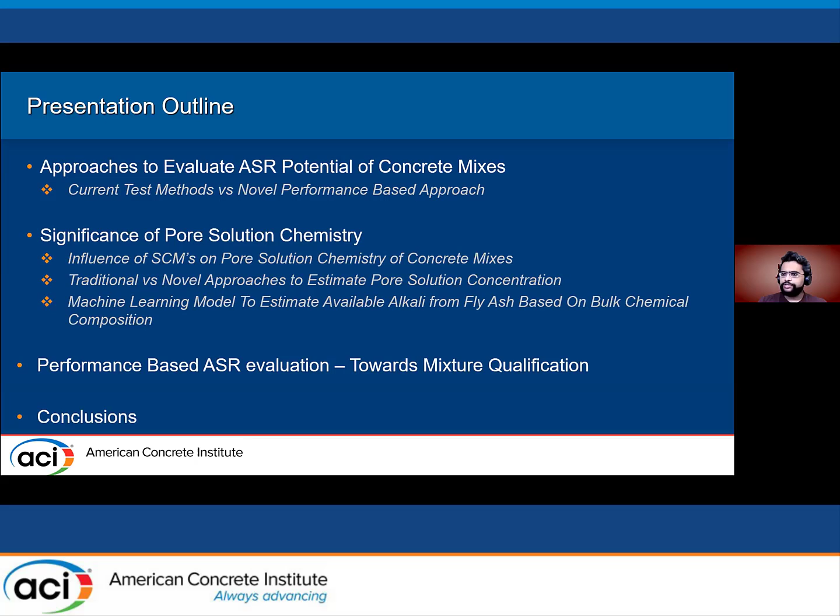So first, discussing the traditional approaches to evaluate ASR potential, we have ASTM C 1260, the mortar bar, and also the ASTM C 1293. The first one is accelerated, which is probably around 14 days, and tested under severe test conditions. But sometimes the results have been found to be not correlated to the field performance, whereas for the 1293, the minimum duration for the test period is 1 year.

Let's look at the limitations of these approaches. These ASR tests really do not address the aggregate reactivity prior to use in concrete structures, and determining the threshold alkalinity of the aggregates is actually the primary step.

Also, the effect of alkalis from cement and the SCMs on the ASR at the direct level of pore solution alkalinity is not considered. These tests are usually performed at boosted levels of alkali, so the testing is not really performed at the level of the real pore solution alkalinity. And also, they do not really address the long-term performance of fly ash in concrete structures.

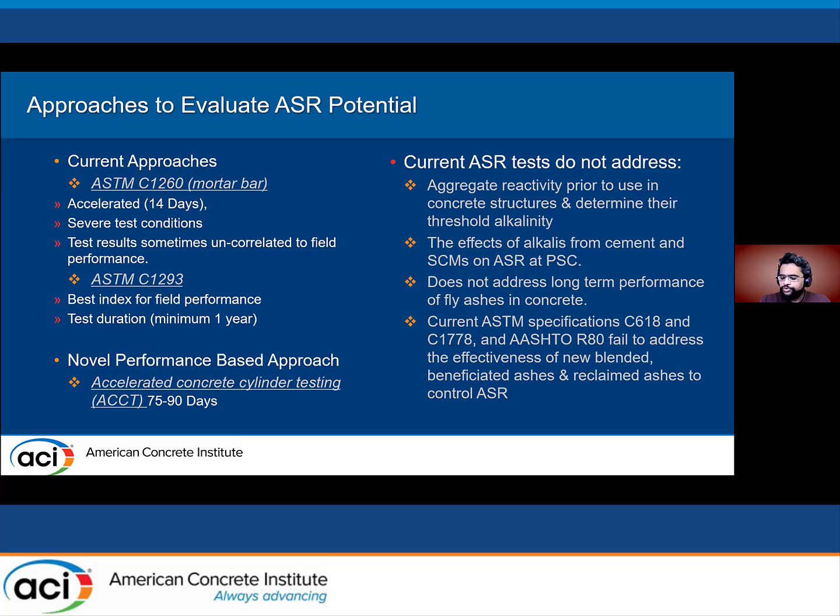So the new approach, which is the accelerated concrete cylinder test approach, presents a more performance-based evaluation to evaluate ASR potential, and also design the optimum replacement percentage for different SCMs. There are 4 different steps to this entire evaluation. The first is determining aggregate reactivity, and we could be using any method, such as the CAP based, which is cumulative aggregate potential based reactivity, or the VCMD test, which usually takes around 5 days, or the ACCT test, which takes about 28 to 45 days. The essence here is to really determine the aggregate reactivity in the first step.

Once we determine the aggregate reactivity, the next step would be deciding the optimum SCM replacement, which is a performance-based mix design formulation. For this, we really need to evaluate the pore solution chemistry for each concrete mix for different SCM replacement levels. And once we have the pore solution alkalinity determined, we go to step 3.

At this stage, it's just a comparison assessment. Is the pore solution alkalinity of my mix lower or higher than the threshold alkalinity of the aggregate that would be used in the structure? If it's lower, then it's not a problem. If it's equal, it would perform well, but only under mild conditions. If it's greater, then the mix design probably needs revision with a higher SCM dosage.

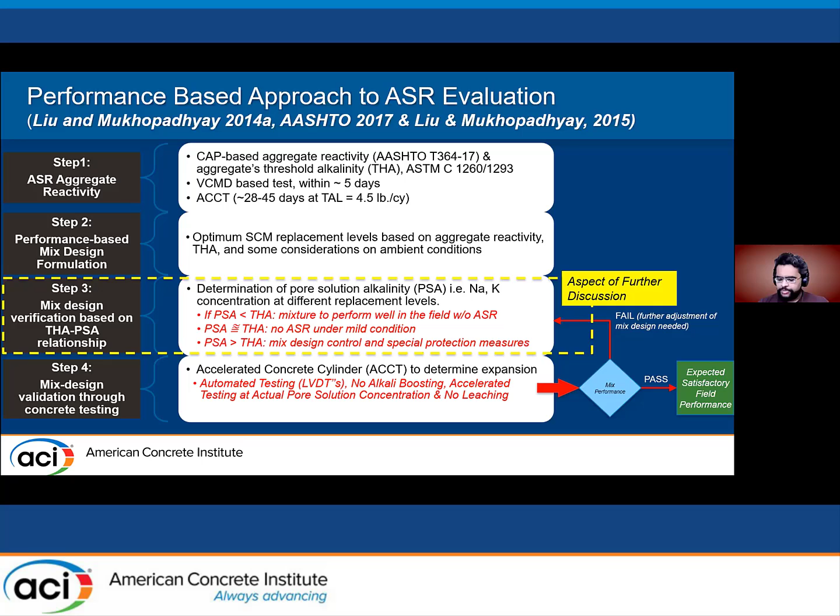Let's look at the overall objective of the alkali silica reaction and how SCMs play a crucial role in that regard. Now, definitely SCMs have been recognized as one of the most effective measures to prevent ASR. And of course, fly ash has been widely used by different state DOTs for ASR control.

But what has been really happening is that due to environmental regulations, there have been a lot of changes in the power plant operations. So this continuously changes the composition of the coal, or indeed the fly ash composition that is coming out of these coal power plants.

So this actually points to a very important fundamental aspect: any new test method, to be applicable, first has to address the performance, which has to be a function of the composition of the SCM. As the nature of the SCM changes, the fly ash composition changes, and the performance would be changing as well. So these test methods need to address the performance based on the composition.

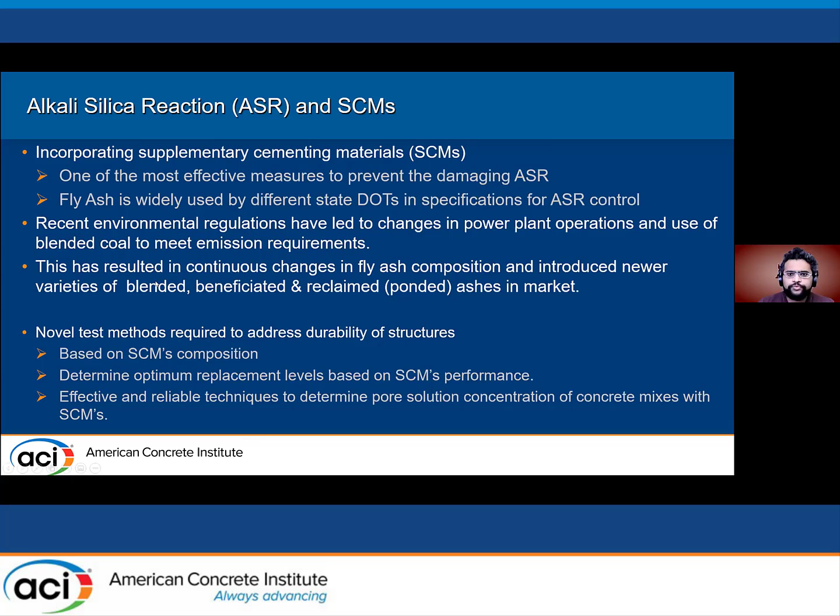And on that scale, the pore solution is the first aspect that we would be looking at. Just a quick discussion on how SCMs actually influence the pore solution chemistry. Now, whenever we look at the bulk XRF data, we look at Na2O or K2O, the sodium oxide and potassium oxide. The value there is essentially comprised of two separate parameters.

One is the crystalline phase or the readily soluble fraction, which is usually available within the first 24 to 72 hours after the hydration reaction starts. And the second component is the bound phase, which is gradually put into the pore solution as the clinker hydrates or as the pozzolanic reaction happens; they are released into the pore solution.

So when we look at some of the factors why SCMs actually contribute to a lower alkali pore solution, one of the common aspects it's attributed to is the cement dilution effect. But if you see the graphs on the right, this would not always be true.

If you replace an equal amount of cement with even class F fly ash, the one that we used in our project, it definitely has higher alkalis as compared to the cement, and class C had significantly higher. So the cement dilution effect for fly ashes has to be considered with a little bit more caution. And second is the slow release of bound alkalis.

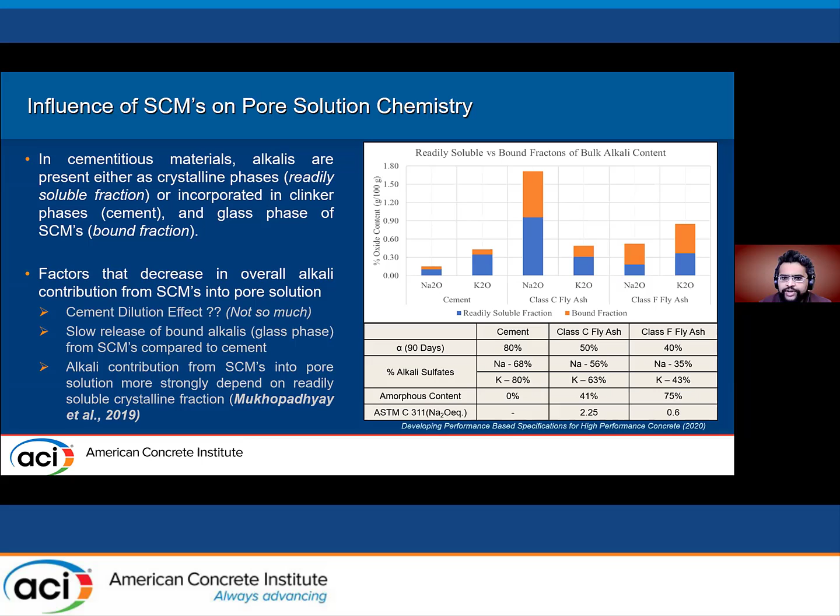So why is the composition really important, and why do we have to consider it for deciding the behavior of these ashes? This is the QXRD quantification of both class F and class C fly ash. As we saw on the previous slide, the contribution of the alkali directly comes from the crystalline phases, and for class C, we see a significantly higher level of alkalis or crystalline phases as compared to class F fly ash.

Now, this is directly reflected in figure 3, where on the x-axis the available alkali to total alkali ratio for class F is lower than class C. What is important to notice here is that we see two distinct peaks, a definite difference in alkali contribution from F and C ash just based on its composition.

And a fourth important aspect that we also need to consider with the SCMs is that these SCMs add silica, or amorphous silica. So as the silica content increases, the C/S ratio in the overall hydrated phase, or the C-S-H, decreases. At a lower C/S ratio, it has the capacity to bind alkali and further lower the pore solution concentration.

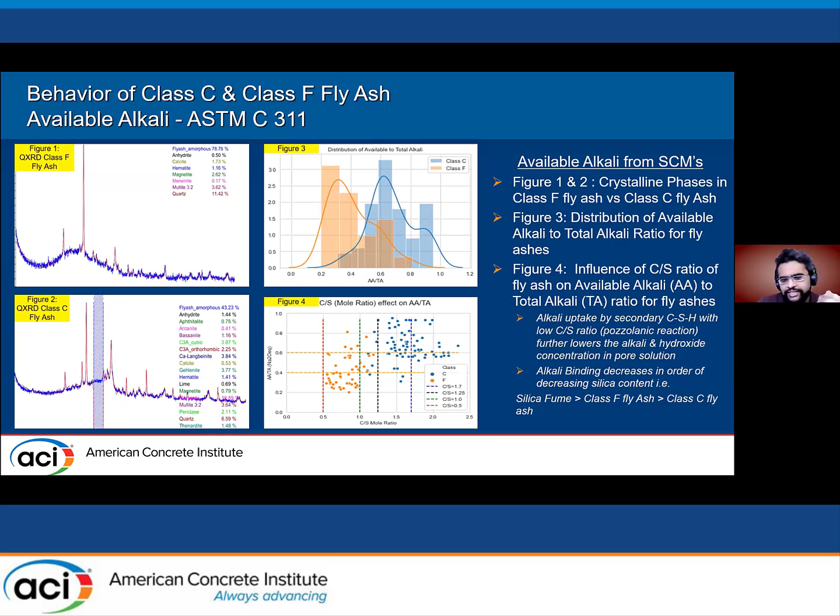If you look at figure 4, the lower the C/S ratio or the higher the silica content, the lower is the available alkali as a fraction of total alkali. And this phenomenon, also known as alkali binding, decreases in the order of silica fume, class F fly ash, and then class C fly ash.

So let's look at some of the techniques that are currently available to determine the pore solution concentration of concrete mixes, even with the SCMs. When we are referring to pore solution concentration, we are generally referring to the sodium and potassium concentration. The extraction technique is one of the most common approaches, but it's a highly complex procedure, limited to very early ages.

There are extremely few studies which have reported extraction values up to the age of 56 and 90 days. But at later ages, the dissolution of alkali in the pore solution increases with the applied pressure. So at a higher age, the more pressure applied, we get artificially high concentrations, which is also a factor to be considered.

Towards modeling, the NIST model is one of the widely used approaches, but one of the things the NIST model does is it assumes a default 75% alkali contribution from all its ingredient phases. If we remember our cement and fly ash composition, the 75% was the average contribution from cement, which appeared to match with cement. But for the fly ashes, it represents an overestimation, and this is more so for class F fly ash.

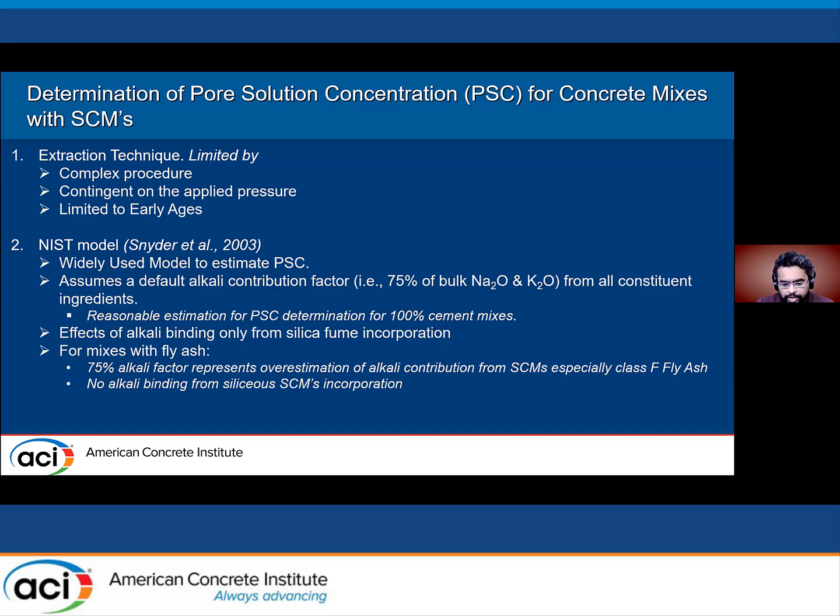So this is a novel technique that was developed in previous research in 2019. This is the combined NIST plus ASTM C311 approach. From our previous discussion, we have realized that whenever we are considering SCMs or fly ashes, we really have to look at the level of available alkali from these fly ashes, which cannot be assumed as a fixed percentage or a constant value. This approach allows us to incorporate available alkalis based on composition. And when you combine this approach with the NIST model, the alkali binding from the silica fume also comes into play.

So for the cement, of course, since there is no SCM, both the NIST and the combined NIST plus ASTM C311 approach perform pretty well. But we really see beautiful results when we look at class F fly ash incorporation, because earlier we saw the class F fly ash contribution to available alkali was significantly lower than the cement. Although the bulk alkali may be higher, the available alkali is lower. So assuming a default percentage of 75 may not be an appropriate method, and we see a huge difference in prediction between the two approaches.

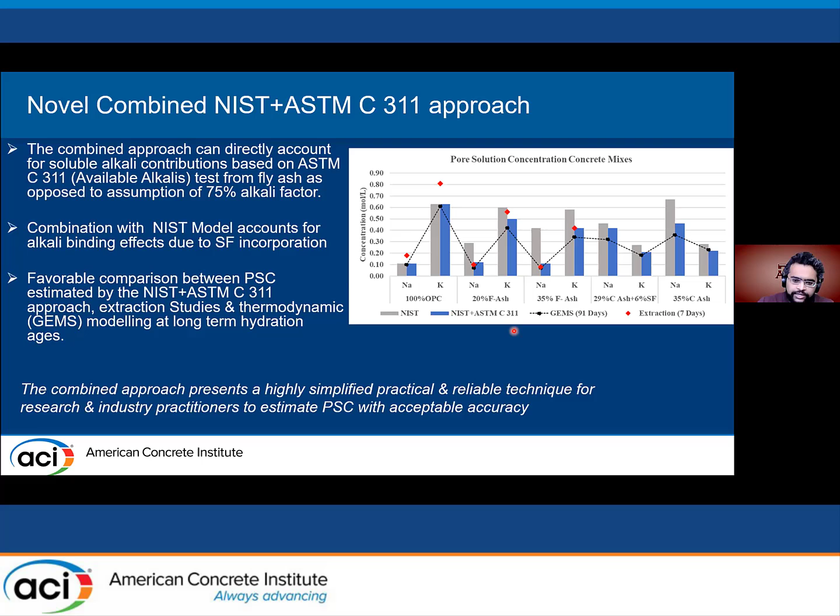Now, when you validate this with the extraction studies, the values for the combined NIST and ASTM C311 approach match pretty well with the GEMS thermodynamic model and also with the extraction studies. The thermodynamic model is a highly reliable method, but it also presents a very complicated technique for industry practitioners. So here, the important aspect is that the combined NIST and ASTM C311 approach presents a highly simplified and also reliable technique for both research and industry practitioners. And it does estimate the PSC with the SCMs with a very high level of reliability.

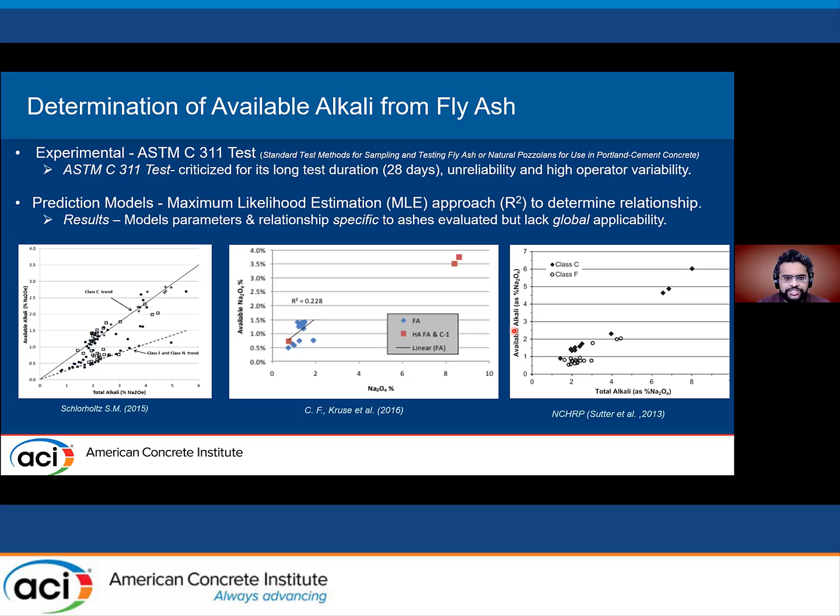Now, to determine the available alkalis from the fly ash, an experimental technique is usually preferred, but the test is usually criticized for its very long duration and high variability. The prediction models often rely on the R-square approach, or the least sum of squares. So we have different equations coming from different studies, but the problem is the equations perform very well for the local studies or the studied fly ashes, but they do not incorporate a global variability. And that's where the machine learning aspect really comes in handy.

So in this machine learning model, we compiled a database of the test results covering almost the last 30 years to train and test the model. And we incorporated the Monte Carlo Markov chain method. It's important to realize that to actually incorporate a global variability, we also need to incorporate the variability in the parameters estimated itself. It would not only be good to estimate a single value, but we would need to estimate it on the basis of the confidence interval.

And that actually is very important, because in extreme critical situations, your consideration has to be towards the level at the 95% confidence, or the upper threshold level, or for very moderate or low severe conditions, we could go even at 5%. So in this model, for one of the test values that we provided, the actual test result was 1.5 and the model predicted 1.4. But this consideration of the overall confidence interval, the 5 and 95%, allows us to incorporate more reliability into the overall estimation.

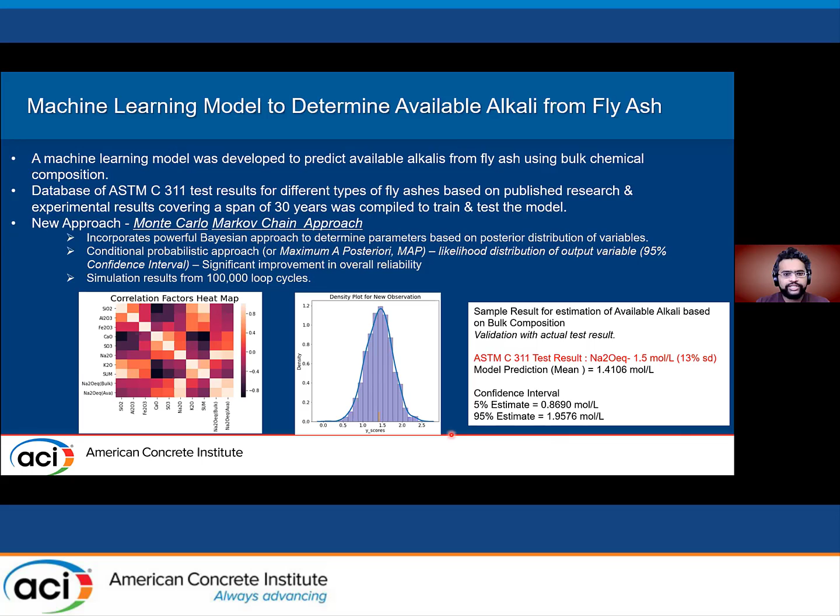So finally, we would look at how these all come together. Our performance-based approach was developed by previous research from 2015 by Dr. Mukhopadhyay and Dr. Victor. The first step is to determine the aggregate reactivity, and as soon as the threshold alkalinity and TAL are established for the aggregate, this combined approach with the machine learning can be used to directly determine the pore solution alkalinity for different levels of fly ash. And this can be compared to the threshold alkalinity to take very quick decisions on what the optimum replacement percent for the various SCMs could be.

And finally, it would go to the mixture validation study, probably the ACCT based test, which takes around 75 to 90 days. And we see that as soon as the pore solution alkalinity by this method was deemed over the threshold alkalinity, the expansion from the ACCT was more than 0.04%.

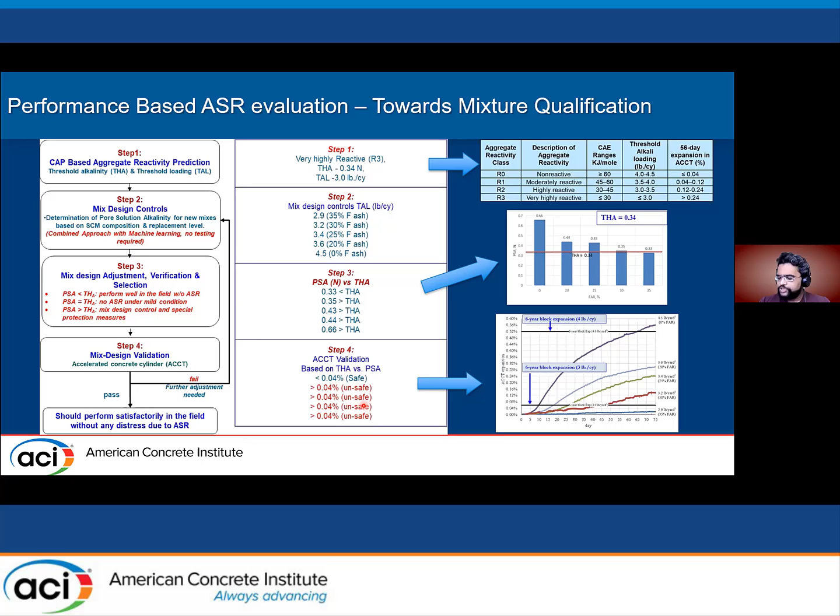So in conclusion, we would like to say that performance-based test approaches are really required to evaluate the ASR reactivity. The first consideration is towards the mixture design. The optimum replacement percentage should be based on the composition and the performance. Once the optimum level of replacement has been determined, the mixture acceptance testing could be performed by the ACCT test method, which usually takes around 75 to 90 days. And it could be performed at the level of pore solution concentration, alkalinity, or low alkali loadings.

Now, to estimate PSC from SCMs, the key component is to focus on the chemical composition. So our approach, the NIST and ASTM C311 approach, provides a very reliable...

Wrap it up quickly, please. That would be great. Yes.

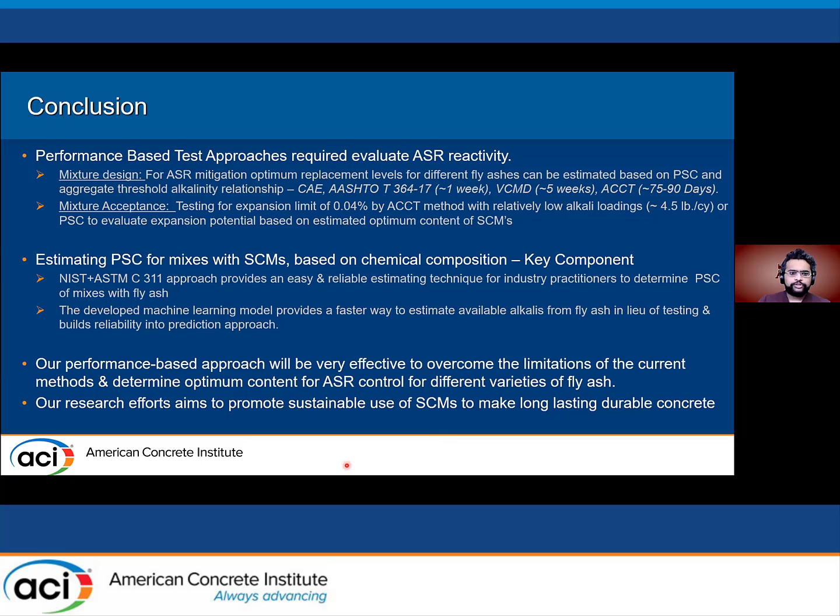And finally, I think the overall research efforts promote sustainable use of SCMs to make long-lasting, durable concrete.